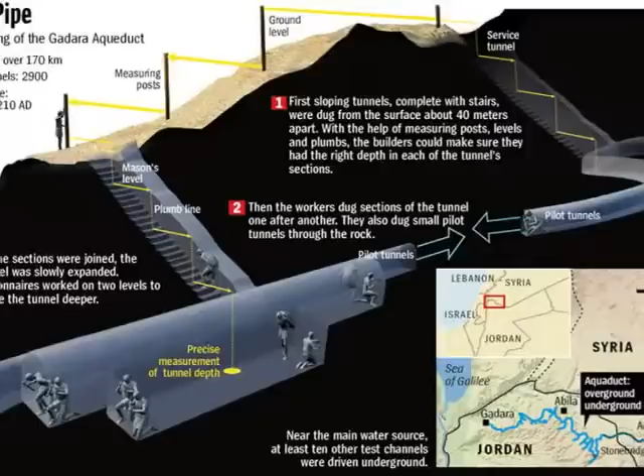Our water systems are inspired by the ancient engineers of the Middle East, Egypt, Greece, and eventually the Roman Empire. The principal strength of the Roman Empire was its peerless civil engineering, especially its infrastructure. In those times, whoever controlled water controlled the quality of life and therefore held substantial power.

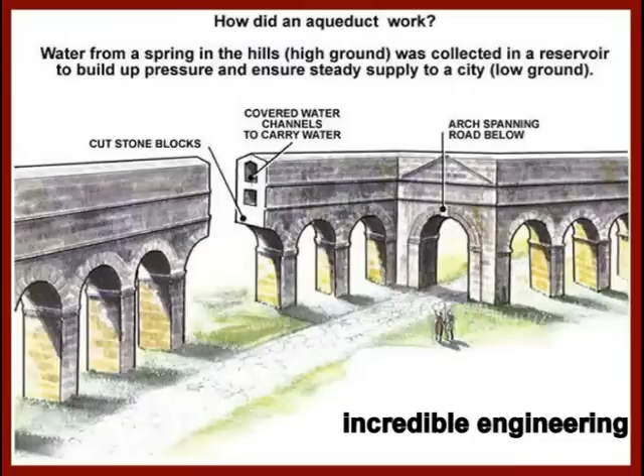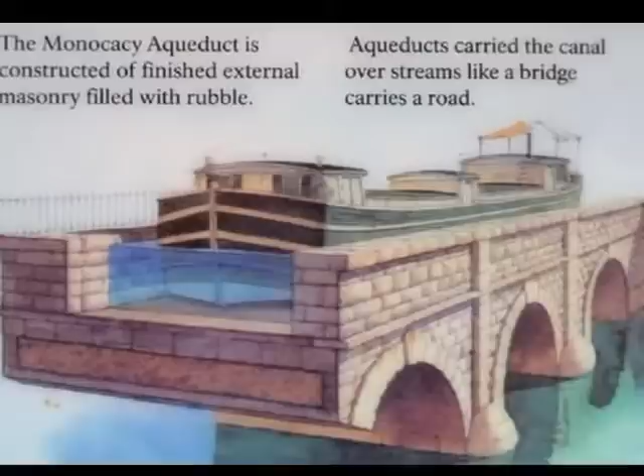When we focus on the Roman systems, we see remarkable accomplishments in mobilizing design skills, fabrication, surveying and planning, manufacturing and construction. Much of that was enabled by a huge slave labor force, as well as by a large supply of special volcanic cement known as pozzolana. The Romans understood mechanics, the principles of the arch, and the fundamental power of gravity and structural coherence and mechanical logic.

Here we see gravity-fed systems built by the Romans throughout their empire, including at Tarragona, Segovia, and Spoleto. Look at the amazing precision, balance, and engineering they accomplished. This has inspired many architects and artists. Many of these components are still in use today.

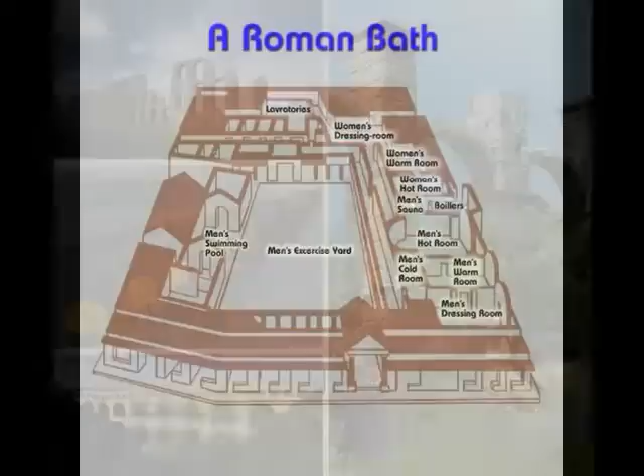Our California systems derived from the specific private capital aspects of California's development, which soon evolved into a public infrastructure. The early proponents of our public water system were resisted by John Muir's Sierra Club as well as private companies, but soon developed following the model of the Los Angeles Water Aqueduct system.

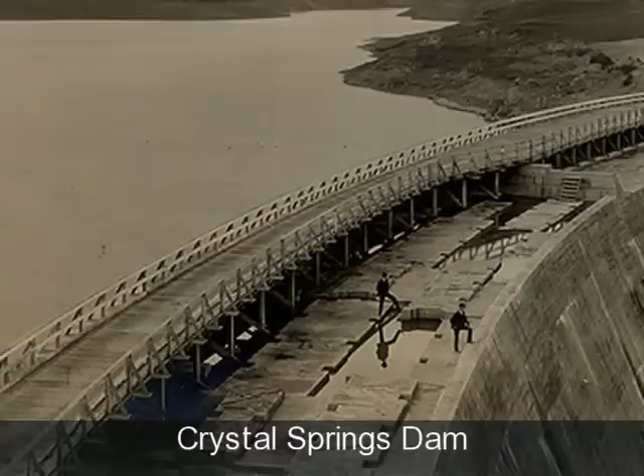Among the great heroes in California water history are Mayor Fred Eaton and City Engineer William Mulholland in Los Angeles, and Mayor James Phelan and City Engineer Michael O'Shaughnessy in Northern California. Much credit should also go to Mayor James Sunny Rolph and his architects Marsden Manson and Carl Grunsky. Incredible work was turned in by surveyors Drenzy Jones, Luis Mercado, and Leslie Stalker.

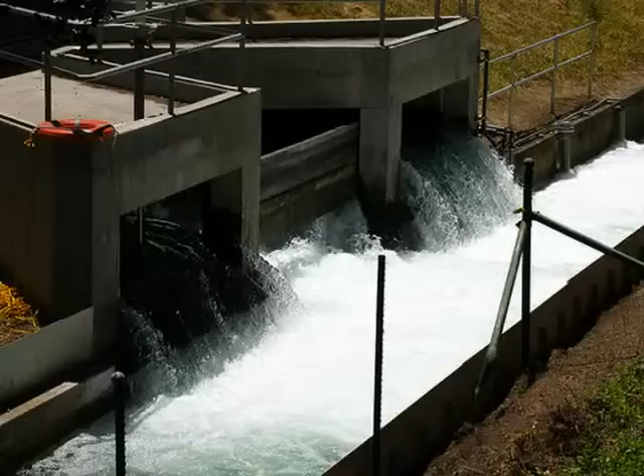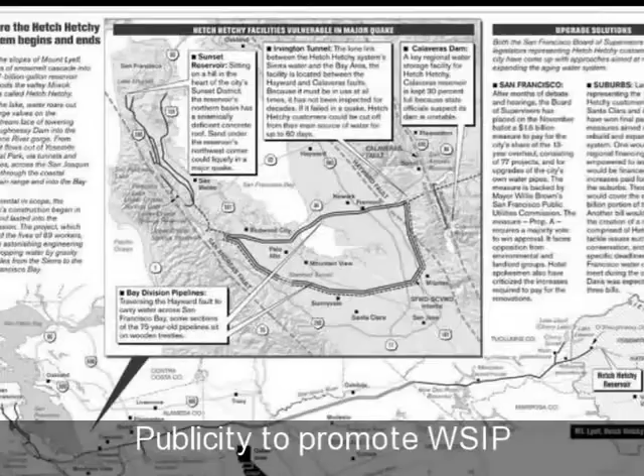And then we had the shock of the Loma Prieta and Northridge earthquakes, and the realization that our vital systems were at great risk. What was to be done? Considerable political organizing and fundraising efforts generated the will to move forward into design and development, fabrication, and installation.

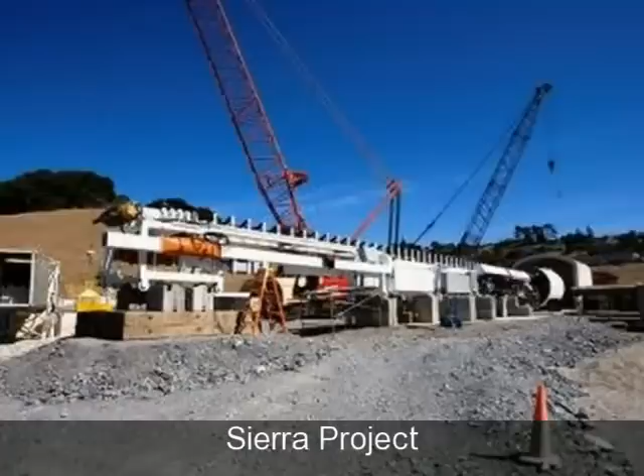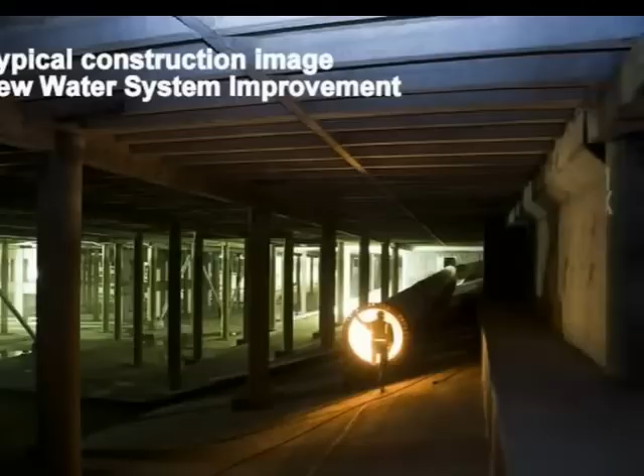Our new water system emerged as a network series of mountain lakes descending from the Sierra through pipelines, crossing the Central Valley to Sunol, then coming up the peninsula into Crystal Springs. Of course, our new water system improvement project, seismic system, follows the original 1914 Freeman Plan, which accomplished our peerless water system by doing the following.

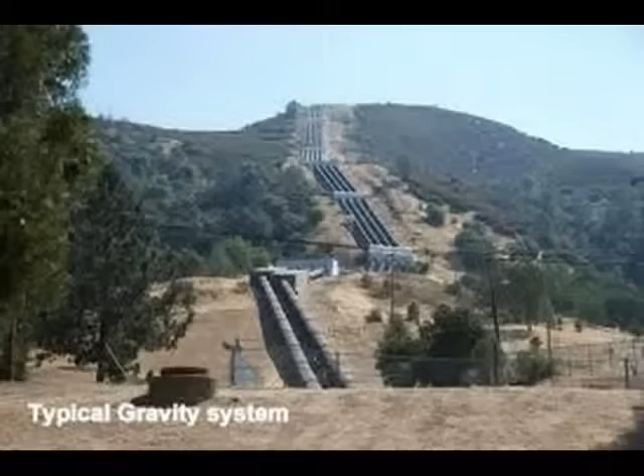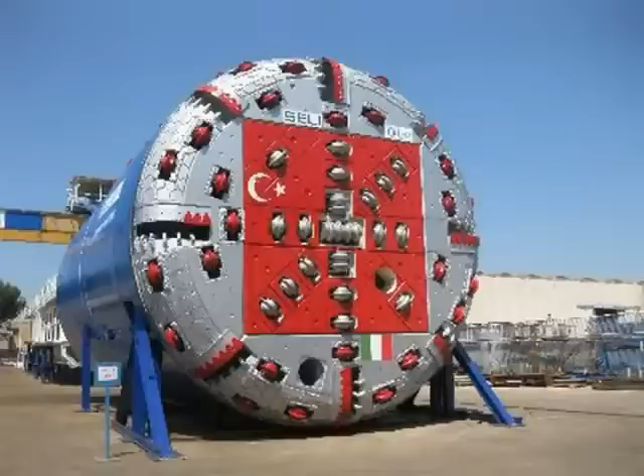First, building a dam on the Tuolumne River at Hetch Hetchy to 75% of its required height, with an addition to be completed later in the 1930s. Second, building an aqueduct from the dam to Moccasin Creek. Third, building a power plant at Moccasin Creek to power what was required, force the system forward.

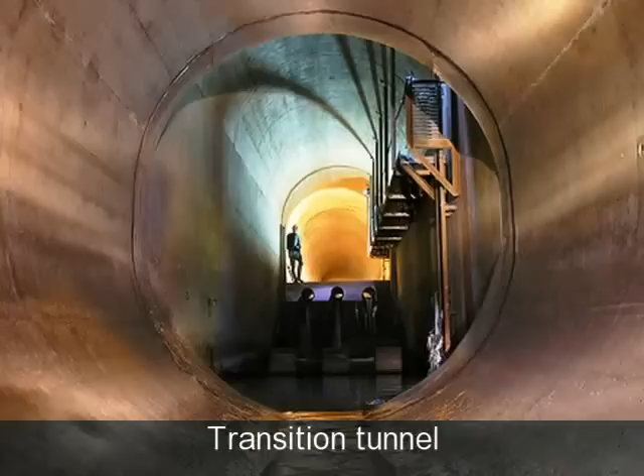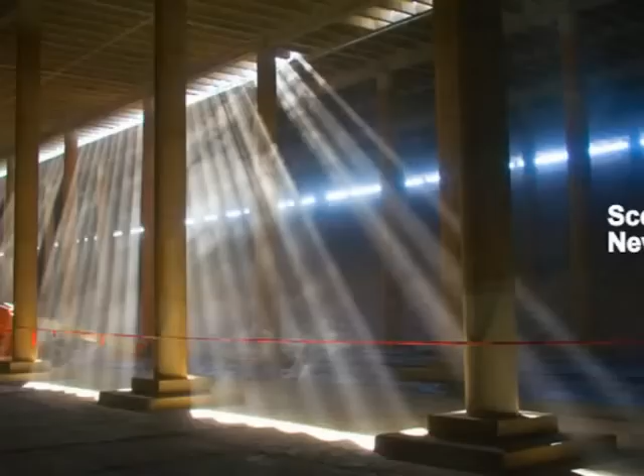Fourth, drilling tunnels through the mountains to the Central Valley. Fifth, building an aqueduct across the valley to Sunol at Calaveras. Sixth, building another aqueduct from Sunol to the Crystal Springs Reservoir through the coastal range. Our current water system improvement project is unprecedented civil and structural engineering.

Can you visualize the path each drink of water from your faucet travels to you? Can you appreciate the efforts of everyone who makes this system operate so reliably?

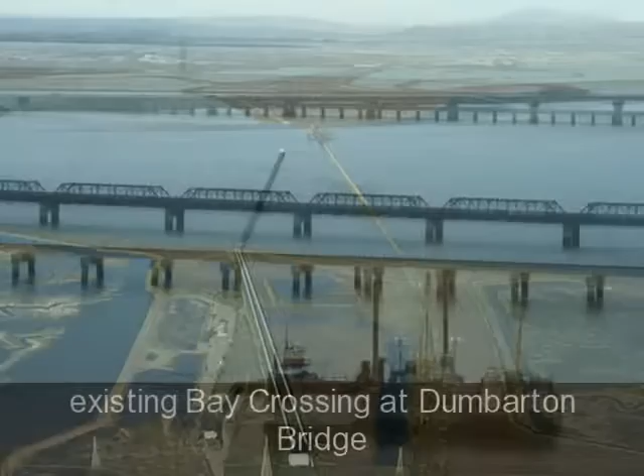This is state-of-the-art seismic safety engineering in water systems. The new tunnel between Irvington Fremont and Menlo Park employs systems never before even attempted, much less accomplished. And it changes the path of our water from a vulnerable bay crossing on the Dumbarton Bridge to safety beneath the bay.

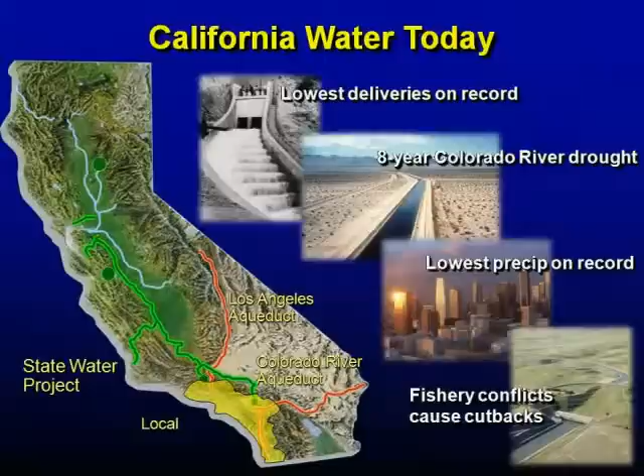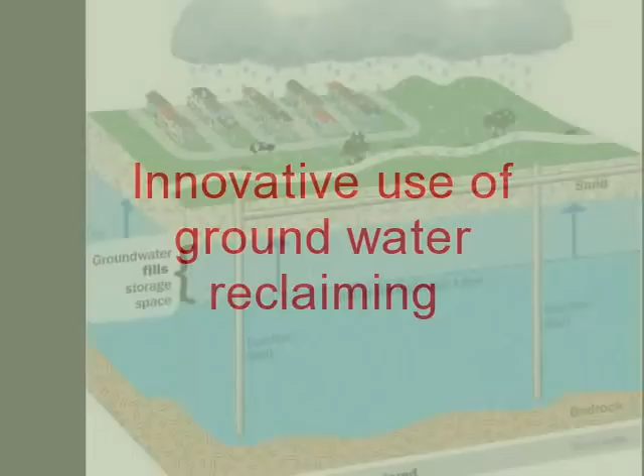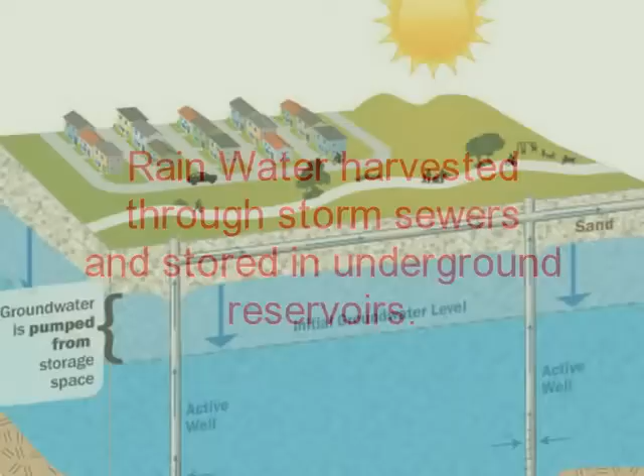This effort at reclaiming rainwater for system uses in fire suppression shows the unprecedented attention to detail by our water system improvement project leadership. Why should our peerless Hetch Hetchy water be used for anything other than human consumption? Can you understand the veneration we feel for this resource?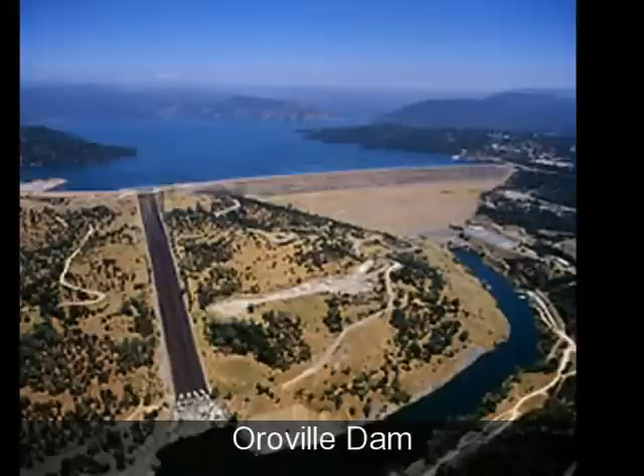I invite all of you to visit one of these incredible sites. In concluding, I hope all who watch this will visit these temples erected to show our deep love for this resource, and most of all, will simply recognize the vitality of this system when you turn on your faucets.